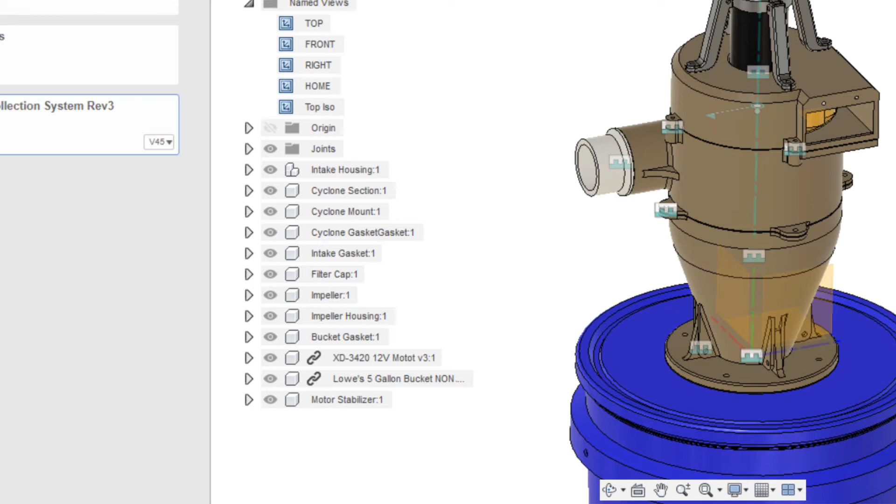This dust collector assembly is a flat assembly, meaning all the components are attached to the top level in the hierarchy. This can be better organized by putting the hose adapter as a subcomponent of the intake housing. That can be done in the browser panel by simply dragging and dropping the hose adapter on top of the intake housing. Notice that the icon for the intake housing changes to show that it is now an assembly and no longer an individual component.

While this can be a good way to work with components, the bodies for the intake housing are at the same level as the hose adapter component. I'm going to undo that change and do this a different way. Keep in mind that every time you add a component or drag and drop a hierarchy, it adds to the timeline. I'm going to create a new component called Intake Assembly.

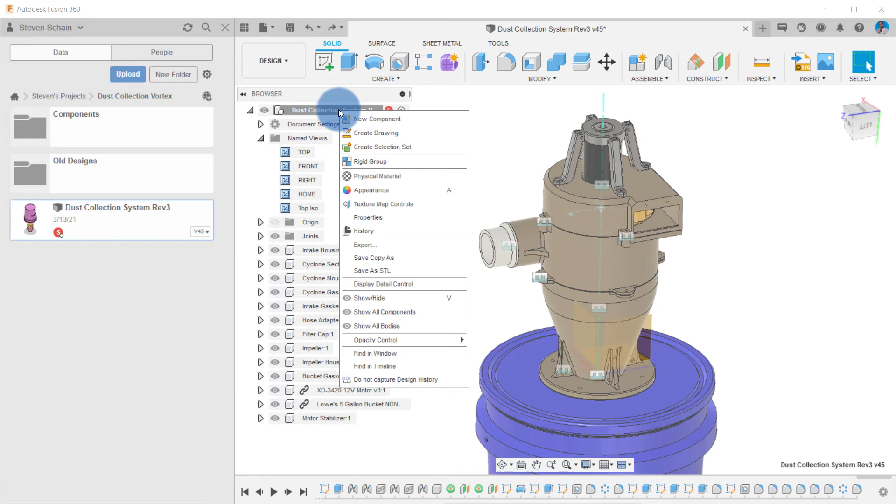I'll right-click on the top level assembly and select New Component. In the New Component dialog, I'll enter the name Intake Assembly and click OK.

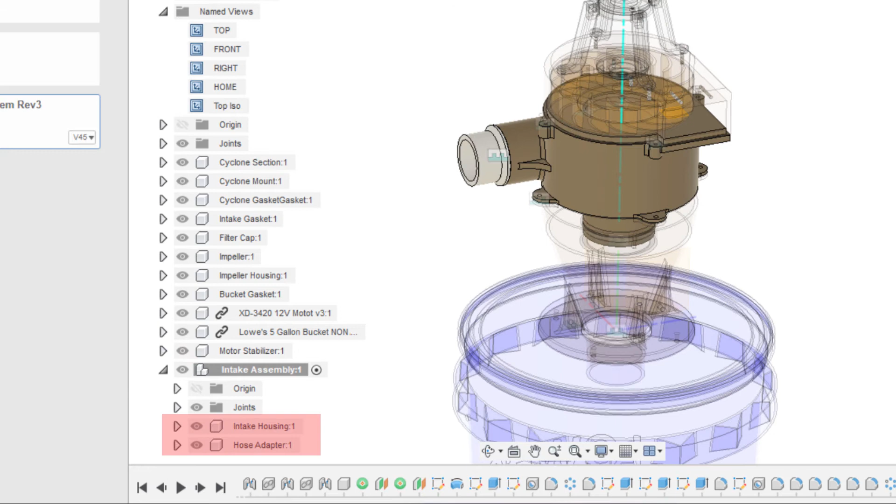Then I'll go ahead and drag the intake housing over the intake assembly and the hose adapter over the intake assembly. This now creates a subassembly that contains the two components, with each component being at the same level in the hierarchy. Use this process to keep your assemblies clean and well organized.

This makes it easier for you if you have to go back at a later time and make edits, and for other people who are going to open the assembly file and work with it.